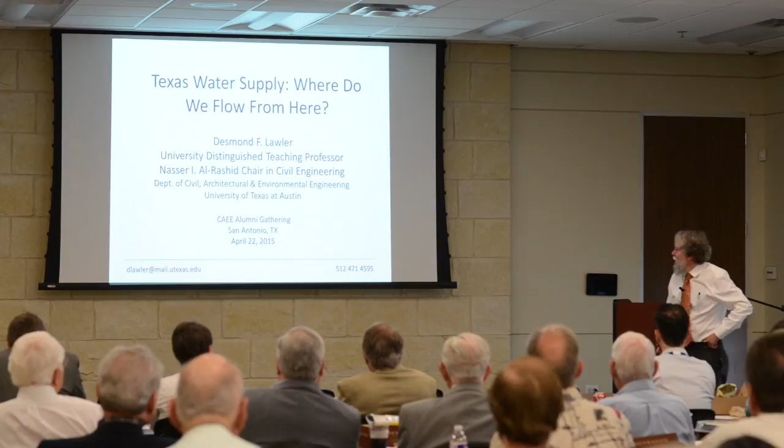Thank you all, and I hope to talk to you today a little bit about where do we go from here in terms of getting water for the state of Texas, and I have some ideas I'd like to share with you in this regard.

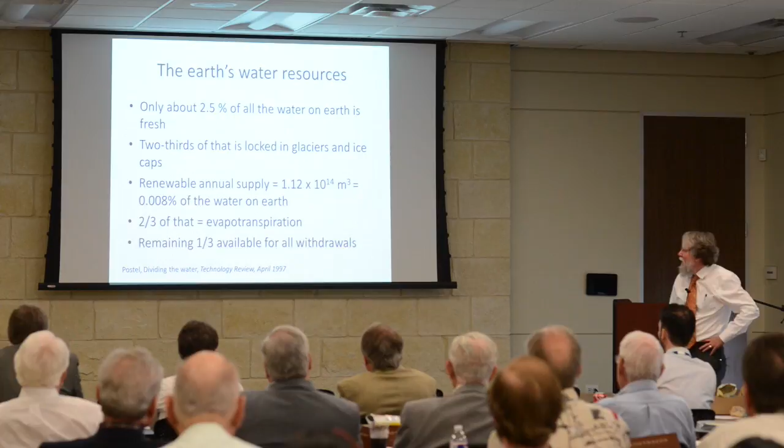Just to give you a little background, the point of this slide is there's not very much fresh water in this world. Only about 2.5% of all the water on Earth is fresh water, and 2/3 of that is locked in glaciers and ice caps. Of course, those are melting, so that number is going to change in coming years, unfortunately.

The renewable annual supply, in terms of what falls as rain and whatever, is what looks like a huge number, but it's only a tiny, tiny fraction of the water on the Earth. And 2/3 of that is kind of recycled through evapotranspiration, which means only 1/3 of that tiny fraction is really available for us for water withdrawals. So even in the best of times, water is scarce.

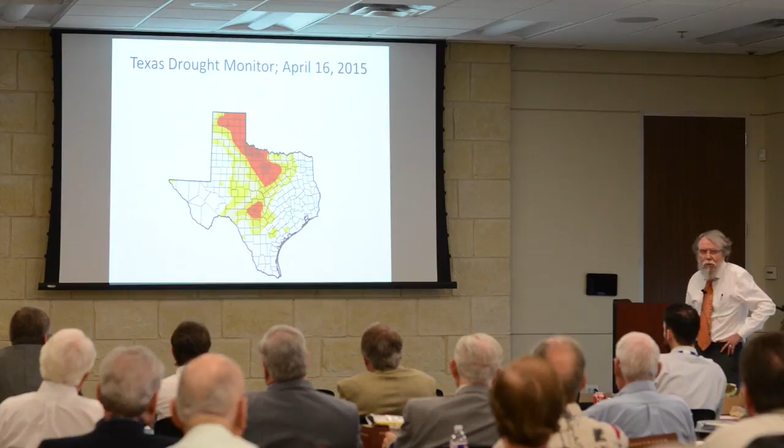So this is a problem, and it's not going away. We have to ask ourselves, where are we going to get water as the population continues to increase? This is kind of all the possibilities for where we might find water.

Conservation, both direct and indirect - I'll talk about that for a bit and tell you what I mean by that and what we can do. Municipal stormwater and rainwater harvesting, which I put together here because a lot of the ideas are similar, even though they're often dealt with somewhat separately.

New surface water reservoirs, new high-quality groundwater supplies - I'm not going to talk about either of those because I don't think they exist. I don't expect that we're going to be making any new reservoirs, or at least not very many. In the United States, we're taking dams away and destroying reservoirs rather than building new ones. I don't think it's going to happen in Texas, at least not in any substantial way. I don't think we have any groundwater supplies that aren't already tapped, and in Texas, over-tapped. So I don't expect that to happen.

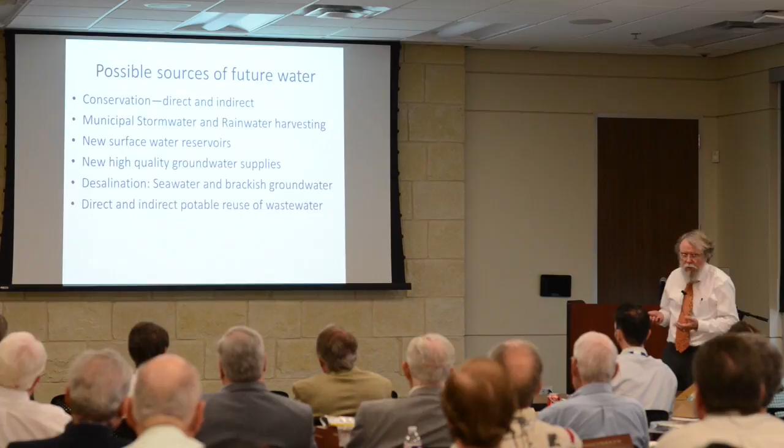Then we have the possibility of desalination, both seawater, which for us means the Gulf, and brackish groundwater, which there's a lot of in Texas. And then the possibility of direct and indirect potable reuse of wastewater.

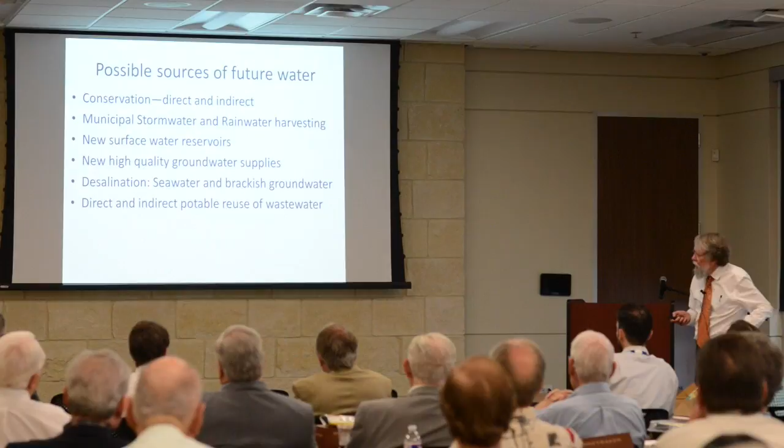So this is basically an outline of my talk. I'm going to spend several minutes talking about conservation, just 1 or 2 slides on municipal stormwater and rainwater harvesting. Nothing at all about these middle things because I don't think they really exist. I've done quite a bit of work on desalination - I'm going to bore you with some research slides on that, and then just 1 or 2 ideas on direct and indirect potable reuse. So that's where we're going today, and hopefully I won't take up all the time, and we'll have plenty of time for questions.

So, the first item we can think about is direct water conservation. I want to start with this because it's the one thing that every individual can actually participate in and make a difference on. By personal choice, you can save water by watering your lawn less frequently or not at all, or you can xeriscape your lawn so that you are not using water in the same way. Showers use less water than baths generally.

Not running the water while you're washing your dishes or brushing your teeth, these things actually make a difference. And of course, not washing cars. In Austin, you're not allowed to wash your car anymore. The only way you can wash your car is to have it done at a commercial establishment, and they probably don't want that to happen either, but you couldn't shut those businesses down.

There's also ways in which by engineering design we save water, and this is kind of interesting. Toilets in the 1950s and 60s used about 7 or 8 gallons per flush. Then around 1970, they went to 5 gallons per flush. Virtually all toilets put in houses and businesses these days are 1.6 gallons per flush, and there's new ones out that are 1.1 gallon per flush.

It turns out that the average person flushes the toilet 5 times per day. So a family of 4, if they have a 1.1 gallon per flush rather than a 5 gallon per flush, it's saving 3.9 gallons per flush in the course of a month. That means over 2,000 gallons of water, which is a substantial amount and actually makes a huge difference. And toilet flushing is the single highest use of water in a household. So if you haven't gotten around to changing your toilets to a low-flow model, I'd recommend you think about doing that.

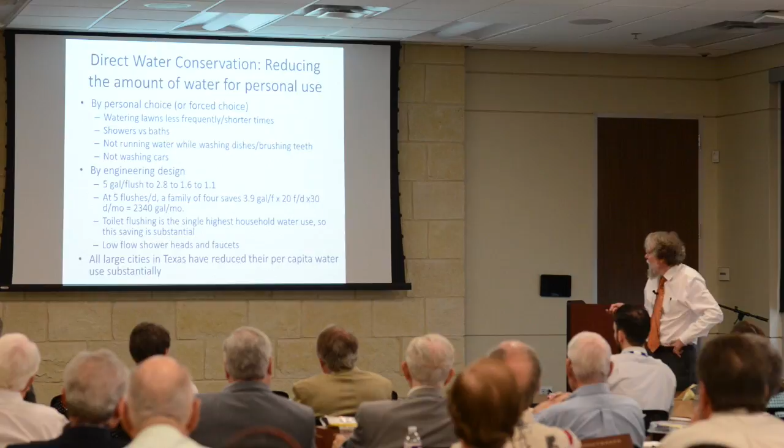And then, of course, there's also low-flow shower heads and faucets, which also in time make quite a bit of difference. It turns out that all large cities in Texas, despite the increase in population over the last 10 years, have reduced their per capita water use quite substantially. I'll show you a slide about that in a minute.

It turns out that there's also a lot of water that can be saved in industrial situations, and this is very site-specific. But I just wanted you to note that 10 years ago, the 5 largest water users in Austin were 4 semiconductor manufacturing plants and the University of Texas. And all of them have gone through a substantial process to reduce water usage.

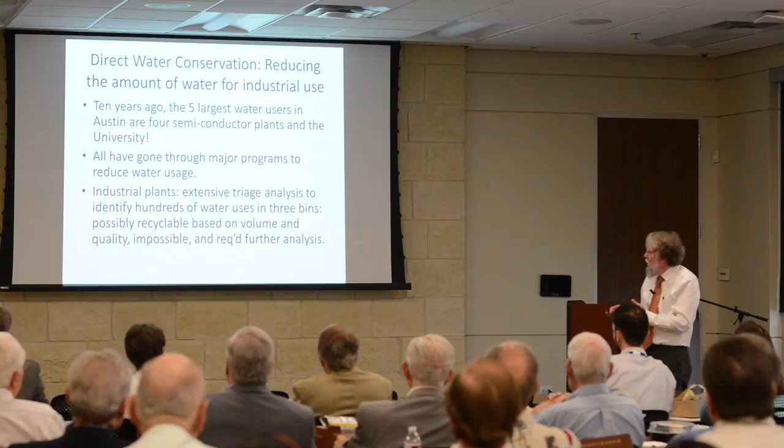I was involved with one of those semiconductor plants doing an extensive triage analysis. They had hundreds of uses of water in their plant, and with a graduate student, we looked at every single one of them for the possibility of reuse based on the quality of the wastewater as well as the volume. Then we started working with them on using the ones with the highest possibility for recycle, and saved a substantial amount of water in that plant.

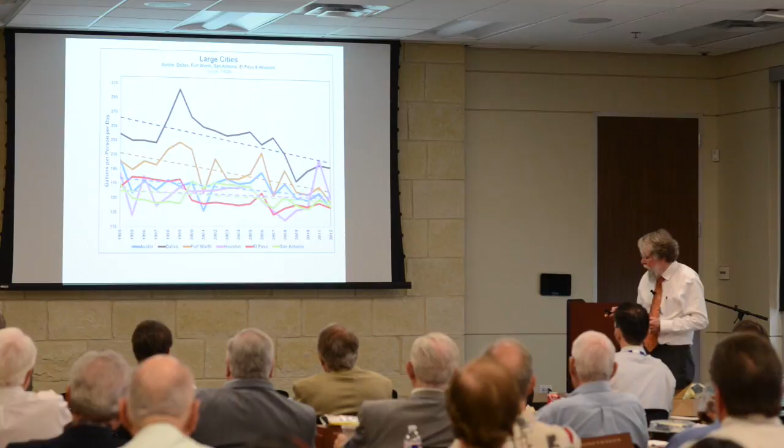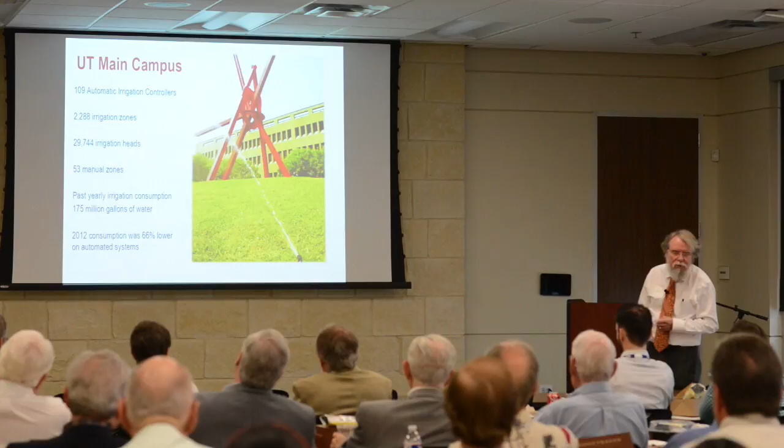This university has done a major job trying to reduce its water use. There's lots of details about this I won't bother telling you, but they have a huge amount of irrigation that goes on to keep the campus beautiful. They went through this process in 2011 to make many of these changes, and in 2012, their consumption of water was 66% lower than the previous year, which is an amazing amount of saving. Mostly it was because of these irrigation changes, although they also made changes throughout the university with low-flush toilets and shower faucet heads in bathrooms that were changed. So a lot of work has been done in that.

It turns out that in Austin, there's so much less use of water that the utility doesn't have enough money. So they've actually had to go to the city council and ask for a change in water rates because people are saving much more water than they had originally anticipated when they set the rates. So that's not necessarily a good thing. I mean, this water savings is a good thing, but the utility not having enough money to run the plants is not a good thing. But it is interesting to see how that can happen.

The second thing I wanted to talk a little bit about is indirect water savings and water conservation. And it all has to do with the fact that energy use and water use are closely related. Because we use a lot of water to produce energy, mostly for cooling towers, and we also use energy for water treatment and distribution and also in heating. So it turns out that these things are much more closely related than you might expect.

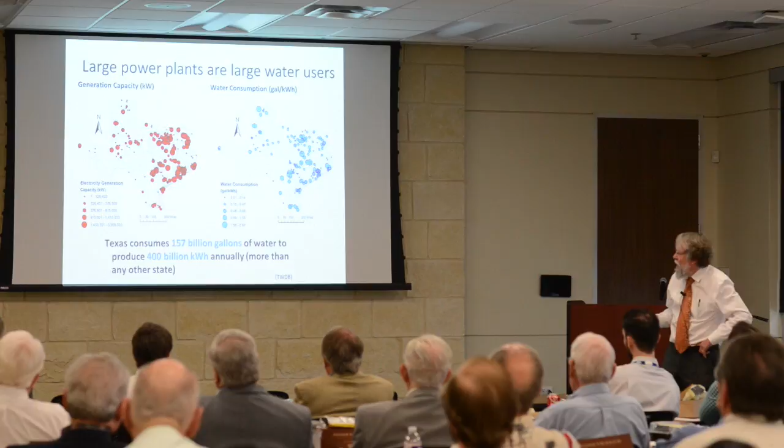So this is just two graphs of Texas. On the left we have the generation capacity in kilowatts, and on the right we have the water consumption in gallons per kilowatt hour. And you can see, just visually, there's a one-to-one correspondence between those things. So it turns out that production of energy takes a lot of water.

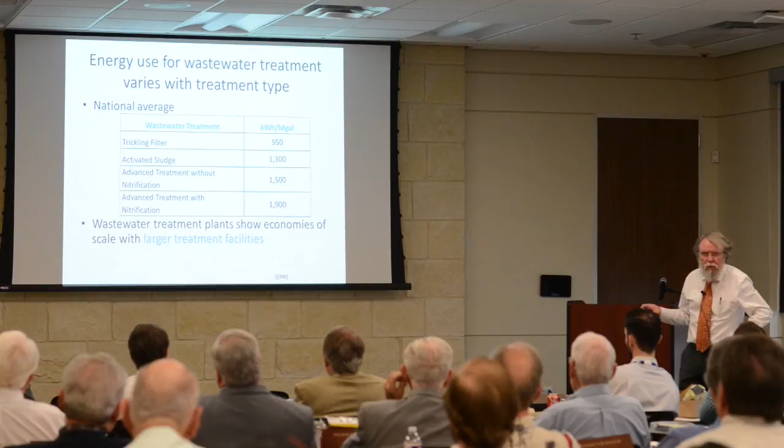And wastewater treatment actually takes quite a bit of energy. The typical plant uses activated sludge, about 1,300 kilowatt hours per million gallons of wastewater. If you do nitrification, it's even more, and if you do advanced treatment, it's even more. And of course, these days we're trying to get to these higher levels of treatment, so we're using a tremendous amount of energy per million gallons of wastewater.

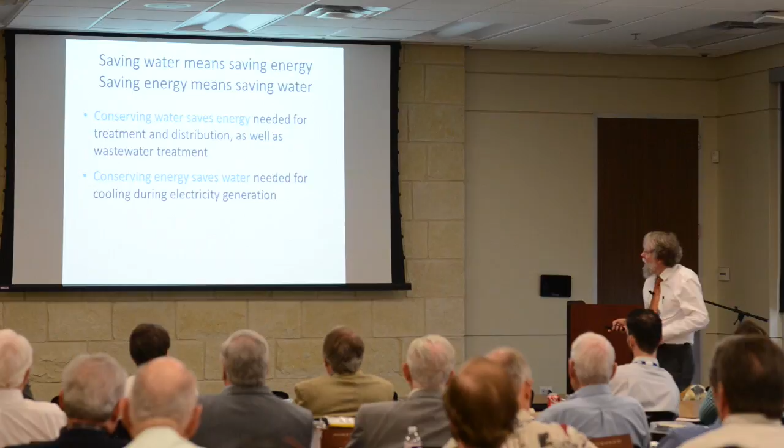So the idea is that if you use less water, you'll have less wastewater and therefore less energy use there, and then you'll have additional water savings from that. So the point is that saving water saves energy, and saving energy saves water. Conserving water saves energy needed for treatment and distribution as well as for wastewater treatment directly. And conserving energy saves the water that's needed for cooling during electrical generation. So if you turn out your lights or replace your light bulbs with LEDs instead of incandescent bulbs, you're saving water as well as the cost of electricity.

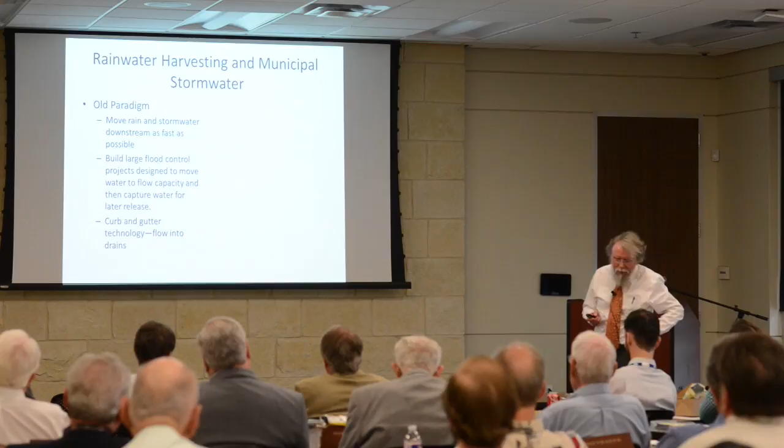Okay, so that's it on conservation, and let me talk just a tiny bit about rainwater harvesting and municipal stormwater. So I think the old paradigm for municipal stormwater was to get it downstream out of the city as fast as possible, and that required building some pretty large flood control projects, or making sure you had substantial drainage projects to have that happen. And you basically put in curbs and gutters to make sure the water flowed into those drains.

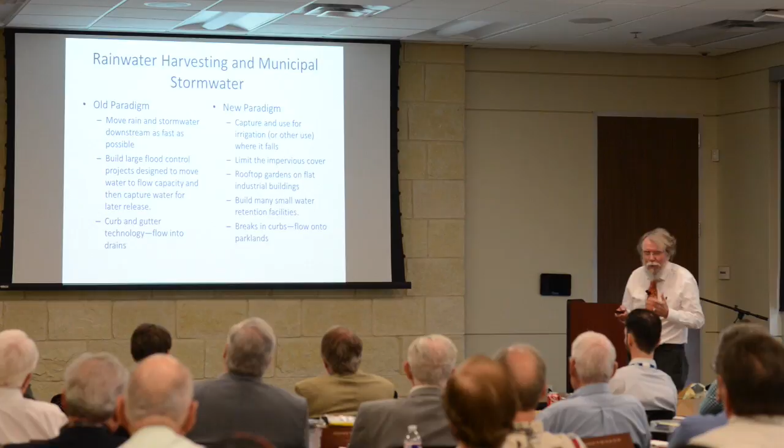But the new paradigm that hasn't really taken hold in our society, but I think should and probably will, is that you capture and use the water for irrigation or other use where it falls. This is a tremendous paradigm shift, and would affect every neighborhood in a city like San Antonio or Austin. You'd have to limit the impervious cover. You could think about making rooftop gardens on flat industrial buildings, of which there are many. And you might build many small water retention facilities so that the water would stay in the neighborhood and gradually get used there for irrigation or whatever.

And instead of trying to do curb and gutter and get rid of the water, you'd actually put breaks in the curbs to let water flow into the parklands or lawns or whatever. And this can make a big difference. And I just thought I'd show you a picture.

I have an editorial remark here about rainwater harvesting. I don't know if any of you are thinking about doing that in your homes, but I really discourage you from using harvested rainwater as your drinking water source. It might be necessary in some places in the hill country and things like that, and that's all well and good.

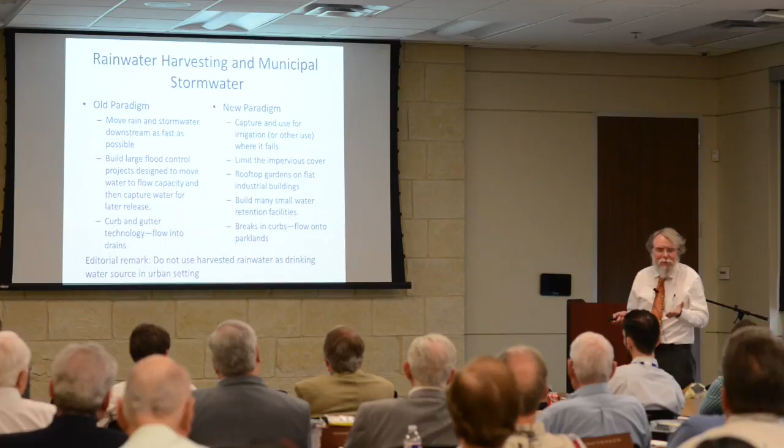You have excellent drinking water in the cities of Texas, and I believe it's much safer to use that as your drinking water source. Harvested rainwater can have a lot of contaminants in it that can make you sick tomorrow or 10 years from now, and I really don't expect people to do the kind of treatment that's necessary to make that water safe.

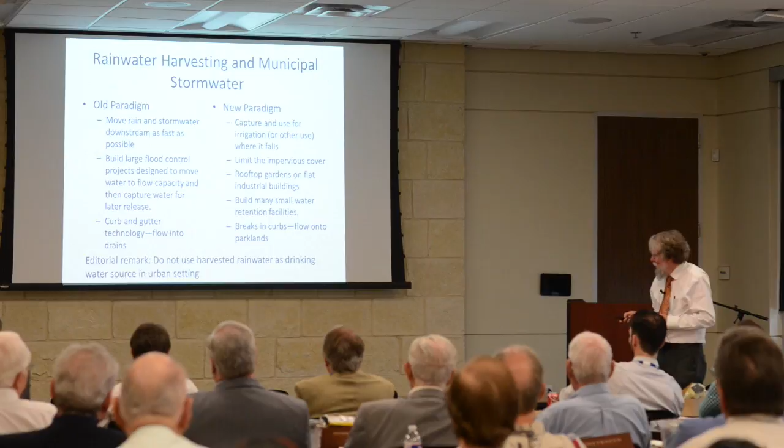His vision is to have this kind of thing done all over the city of Seoul, and for that matter, all over the world. In Seoul, it's really critical because they get a fair amount of rain and have tremendous flood problems. If they could actually capture the water on the rooftops, it would help. I don't know if any of you have visited Seoul, but it's a concrete jungle—20 million people live there, and rainwater and flooding are big issues. This would be a way to think about solving it. So I'm proud of my PhD graduate for coming up with this idea a number of years ago.

Okay, so I want to talk some about desalination, which I've done a fair amount of work on. I just want to highlight a couple of the things we've done in our research, and then try to make it make sense in terms of water conservation.

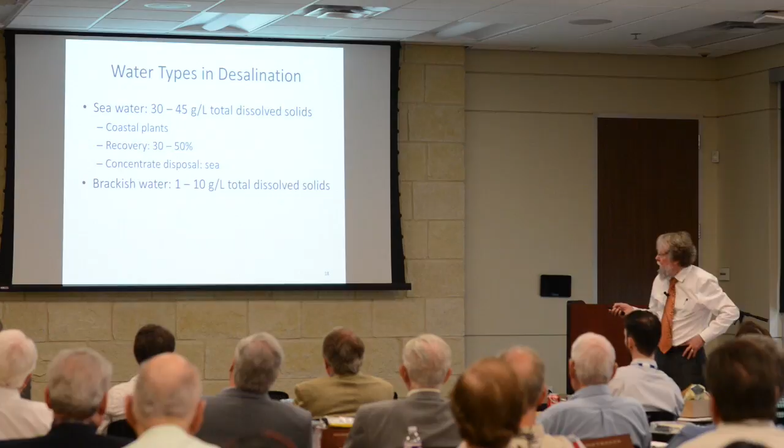There's a difference in how you do desalination, or what you can expect, between these. In seawater, of course, you're talking about coastal plants. The recovery—the fraction of water you bring into the plant that you actually get to use as drinking water—is in the range of 30 to 50%. Typically, the concentrate disposal is to just dump it back in the sea.

This is actually somewhat controversial in California right now, where one of the major cities is thinking about doing desalination in a major way, and people are wondering whether it's really okay to put that concentrate back in the sea. By the concentrate, I mean it's going to have all the salt in it. So if you get, say, 60% recovery, you're going to have 2.5 times the salt concentration in the concentrate than you started with, or at least approximately.

What happens if you put that back in the sea? Well, if you put it far enough out in the ocean, it's almost as close to an infinite sink as you can imagine. But if you put it near the coastline, it could have some real problems. And of course, if you put it far out, it's going to cost you a lot of money to do that. So it's somewhat controversial, but generally speaking, people think putting it back in the sea is okay.

But in brackish water, you're dealing with an inland situation where you don't have the sea as a reasonable place to put the water. Because you have less dissolved solids, you end up being able to recover a much higher percent, 65 to 90%—again, that's the water you actually get to use versus what you put in. Somewhere in the range of 75 to 80%, in the middle of that range, is most common, and this is happening in Texas, in several places.

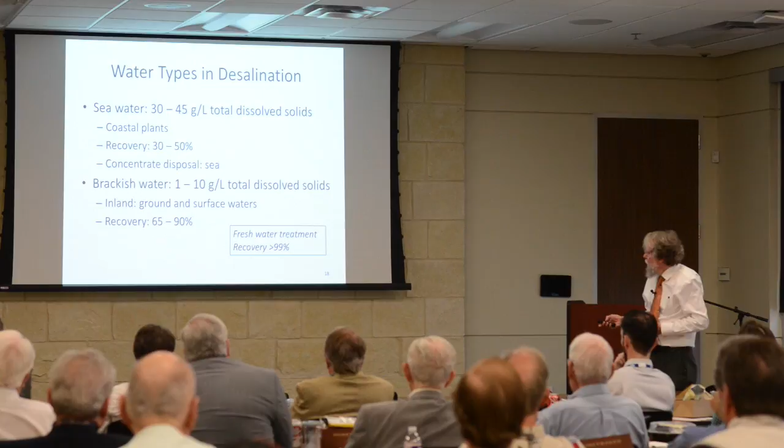So the real question for brackish water is, what do you do with that concentrate? Where do you put it? What do you do with it? That's a question that we addressed in our research.

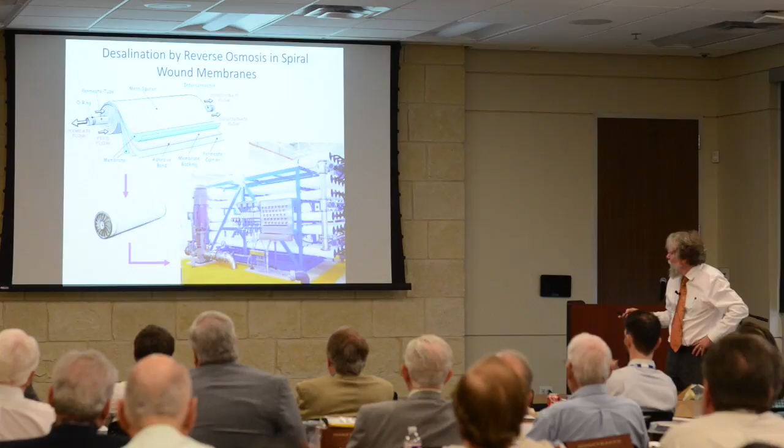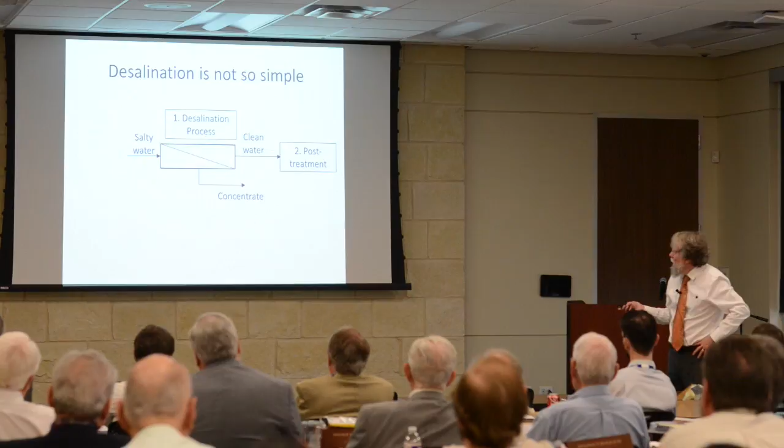Desalination is really not so simple. There are issues associated with the desalination process itself, with the post-treatment of the water, with pre-treatment, and with concentrate. My own research has had to do with pre-treatment and concentrate management, and I'll say more about that.

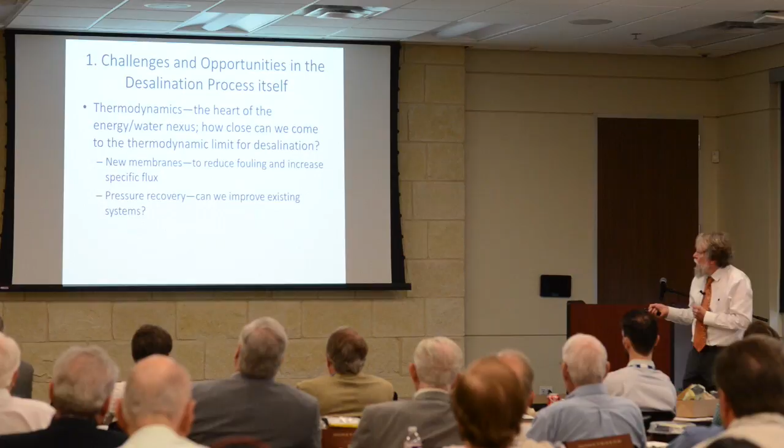Within the desalination process itself, there's a thermodynamic limit to how much energy is the absolute minimum you can spend to get salt out of water. The question is how close we can come to that with good engineering to save energy. There's been a lot of progress with new membranes that reduce fouling and increase flux, how much water you get through per unit area and per unit of pressure, and also whether you can recover the pressure used in the process.

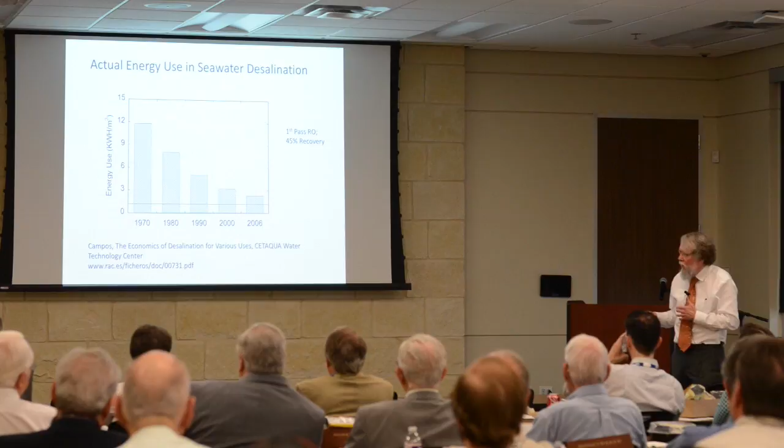In 1970, people said it's impossible, way too costly to do in every way. Now, with the latest data I had from 2006, and there have been improvements since, it's somewhat reasonable. It's still a big use of energy and still more expensive than other things, but it's not out of sight to do desalination. And this is for seawater, which is more expensive than brackish water.

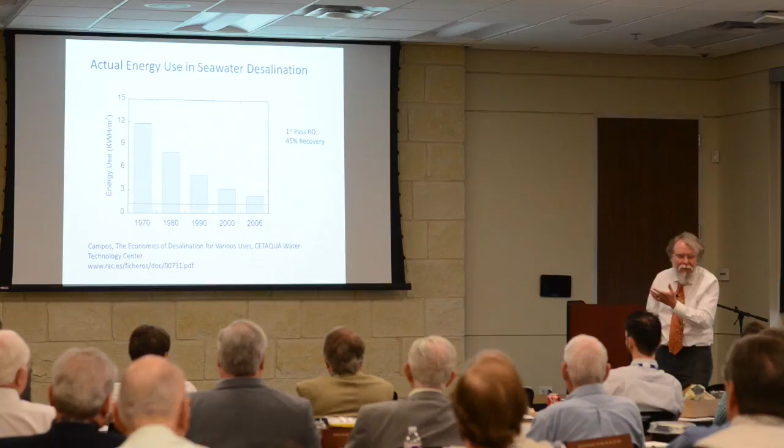Post-desalination is interesting. It turns out the water that comes out of reverse osmosis membranes is so clean that it's a problem. It's too corrosive to just put in pipes, and it tastes terrible. I don't know if you've ever tasted distilled water, but it's like you want to spit it out because it has no taste.

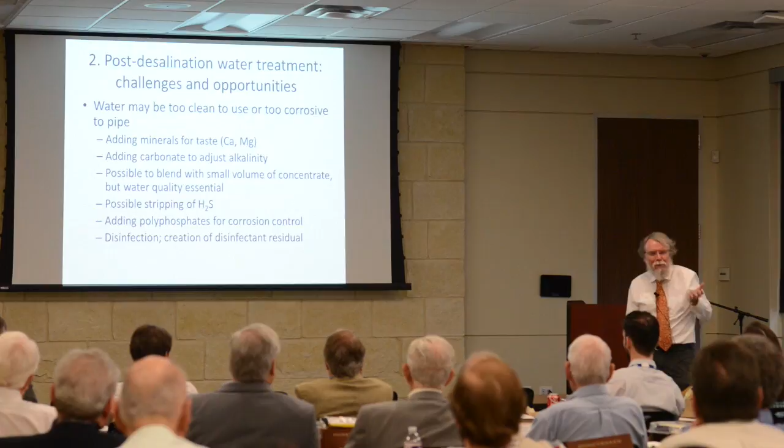Where does the taste of water come from? It comes from minerals. Coke and Pepsi, who make bottled water, like Dasani and the Pepsi brand, and I guess we have Ozarka here too which is theoretically natural, do reverse osmosis treatment, ozone treatment, and other things to make the water as pure H2O as they can. Then they have their own recipe for what minerals to add back so you actually like the taste when you drink it.

If you do this for a whole city, you also have to add minerals back to make it taste right, and add carbonates to adjust alkalinity so you don't corrode the pipes. It's conceivable in some cases you could blend with a small volume of the concentrate, but that would be rare because the water quality probably wouldn't work well. You also have to add polyphosphates for corrosion control, and you have to do disinfection. So there's a lot of work to do after desalination to make this work.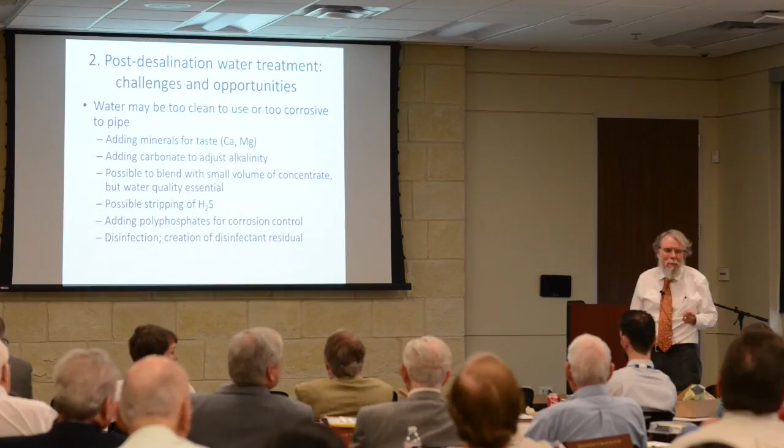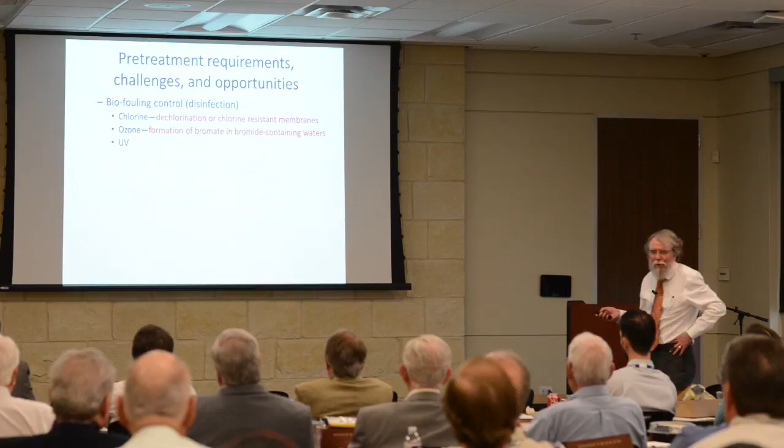Pretreatment has several opportunities or challenges. One is we have to control biofouling of the membranes. That would be not a good thing. So we have to do chlorination or ozone treatment beforehand. If you do chlorination, then you have to dechlorinate because the membranes can't handle the chlorine.

There's particle removal processes which are typically important. And then the biggest problem in reverse osmosis membranes is precipitation onto the membranes, which is called scaling. So you have to do some kind of scaling control to make this work.

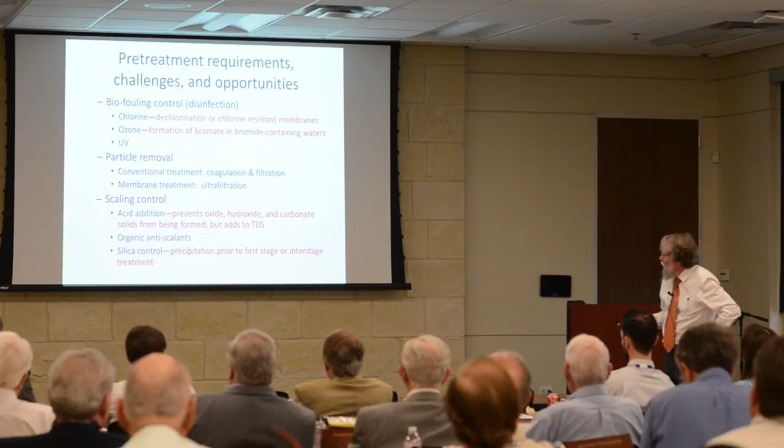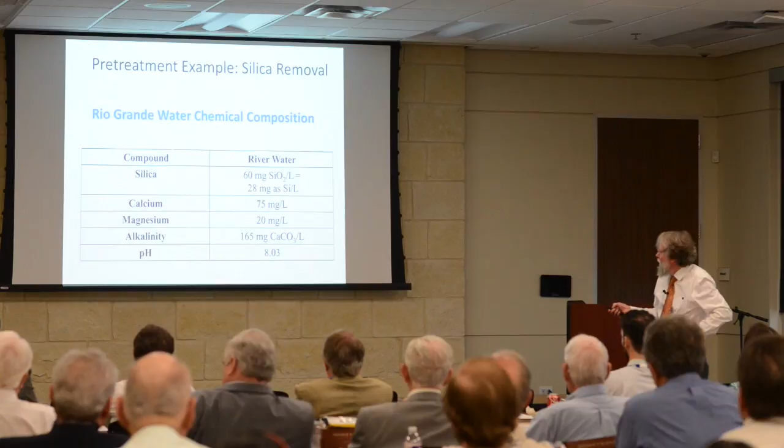I'm going to talk a bit about our research on silica control. It turns out the Rio Grande River has a substantial silica concentration, and if you're going to desalinate that water, silica is going to limit what kind of recovery you can get. It also has a fair amount of calcium, magnesium, and alkalinity, which are important to us as well.

Without boring you with all the details, we did a variety of tests to figure out what pretreatment would be necessary. We came up with various treatments adding lime, some magnesium, and some sodium carbonate. This raises the pH and precipitates several things. As a result, we went from raw water with high silica, magnesium, calcium, and alkalinity to much, much lower levels in all of these cases.

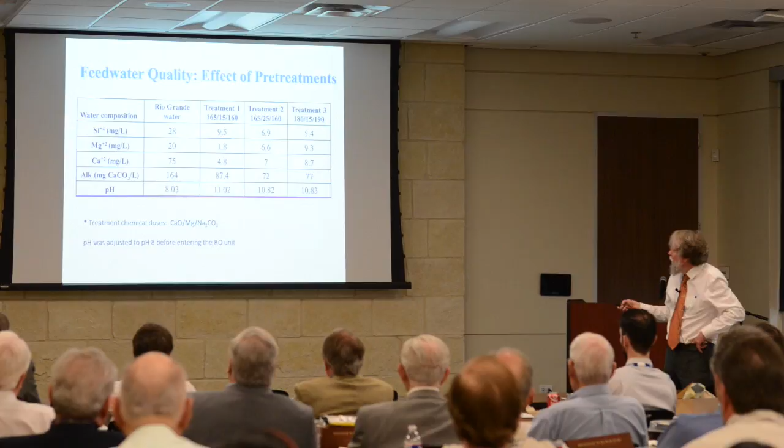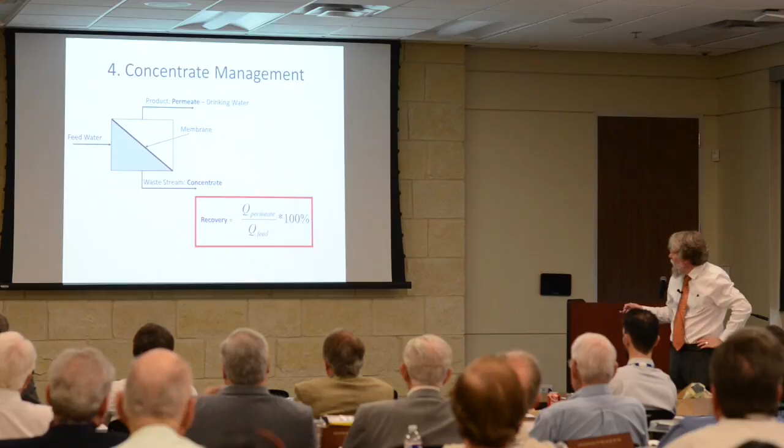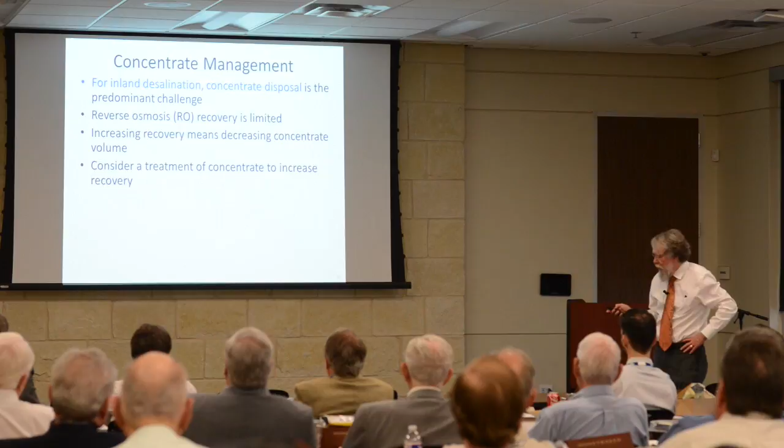Concentrate management is another area I've spent quite a bit of time on. The idea is: what can you do with this concentrate? This is the predominant problem in inland desalination, what do you do with the concentrate? Our idea was to consider treating the concentrate itself to allow you to increase the recovery further. We did this in a couple of different ways.

Here's how this works. You usually have a few, 2 or 3 RO units in series, taking the concentrate of one as the input to the other, and taking what passes through the membrane as your product water. You usually put 2 or 3 of these in series, and then have to throw out the concentrate. But we decided to use either electrodialysis or another system as a way of recovering even more and adding to the product water.

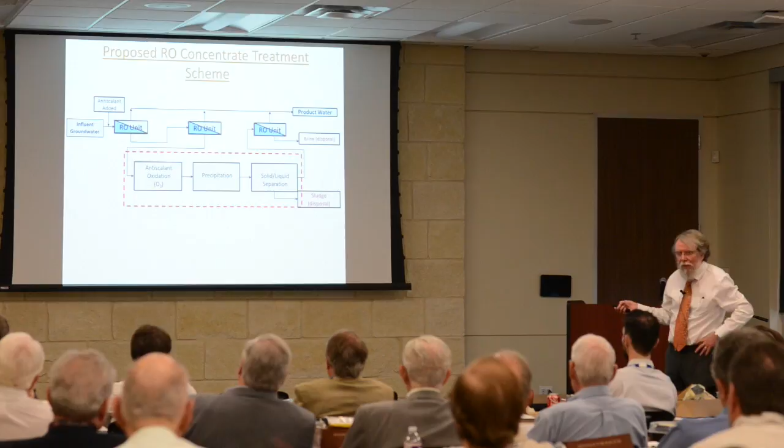The other way we did this, besides electrodialysis, was a scheme where we oxidize, then do anti-scaling, then precipitate in a separate unit. So rather than have scaling happen on the membrane, you precipitate separately, then do a solid separation to get rid of that precipitate, and take that water and put it back into the next RO unit.

We did lots of things where we tried to do the anti-scalant oxidation, and that's measured here because the anti-scalant had phosphorus in it, so we measured how much phosphorus was released. We did lots of different experiments, and I'll show you what they were about in a minute. Some worked very, very well, and others didn't work nearly as well.

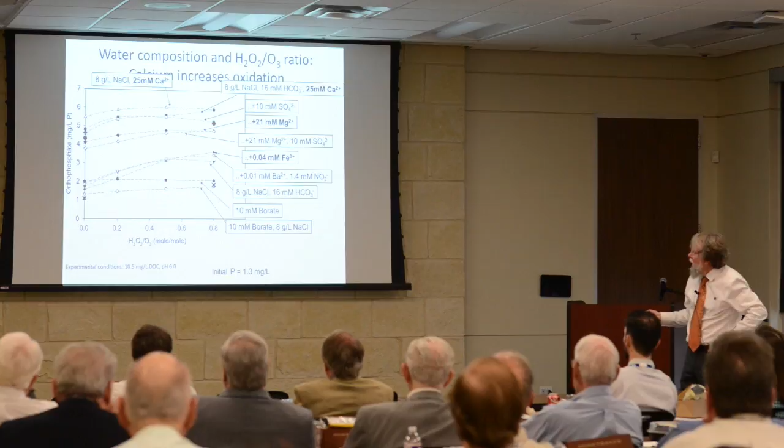We're using a combination of hydrogen peroxide and ozone to do that oxidation. We did all these different conditions, and they all had different results. The key is that all the top ones, which are good, contain calcium. When you had both iron and calcium in there, it didn't do so well. And all the ones at the bottom didn't have calcium. So calcium was clearly a key player in this.

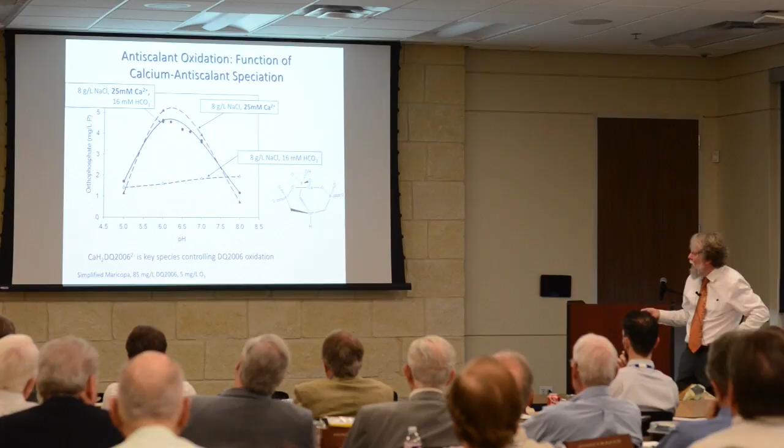We did lots and lots of experiments to try to figure out why. It turns out the bottom line of this result is that the calcium could complex with the antiscalants in the water and change the conformation of it to allow ozone to attack this molecule. Very complicated to figure this out.

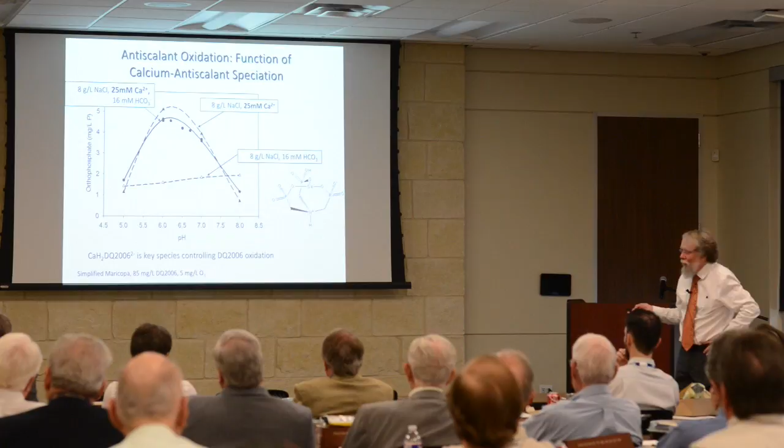PhD student Lauren Greenlee did this work for her PhD. The result is that you could improve the recovery of desalination substantially, from in the range of 80% to perhaps 95 to 96%, by doing that change. That's a huge difference in terms of how much water you have to dispose of.

If you have 80% recovery, you have 20% of water that you have to dispose of. If you have 95% recovery, you have only 5% of the water that you have to dispose of. So you've reduced that disposal problem by 75%. So it's not so much the value of the water, it's the saving of the disposal problem that makes this worthwhile.

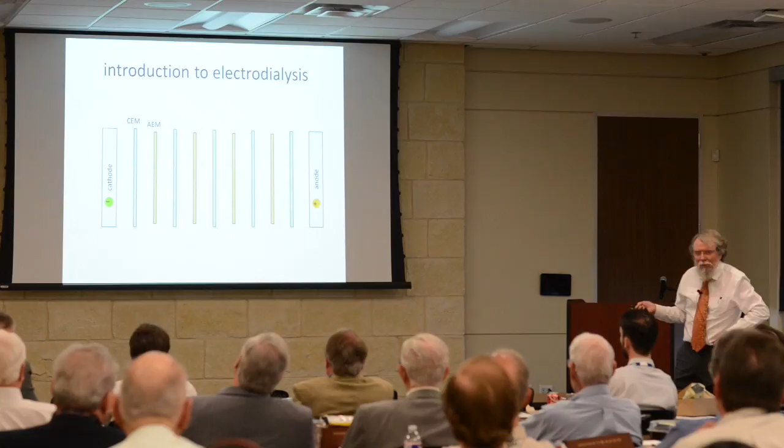The second way we did it was with electrodialysis. It's obviously an electrical system. You have a cathode and an anode, and membranes in the middle - a cation exchange membrane and an anion exchange membrane. You put water up through them all.

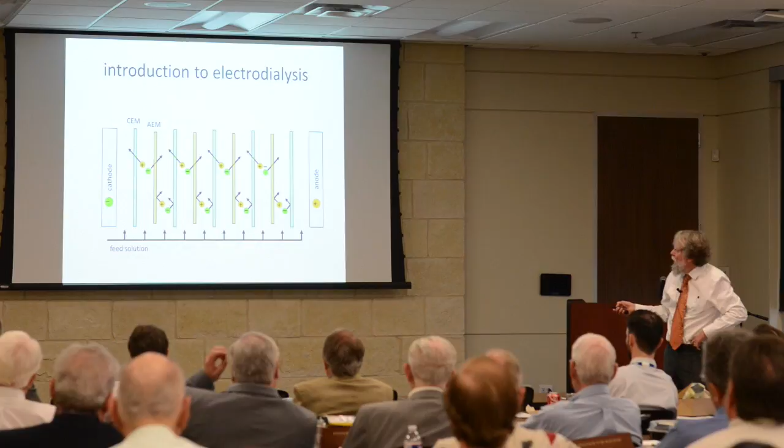It turns out that in some cases, with an anion exchange membrane, cations can't pass through, so they try to go toward the cathode and can't get there, and the anions try to go to the anode and can't pass through the cation exchange membrane, so they're trapped. But in the adjacent units, the cations can pass through the cation exchange membrane and the anions can pass through the anion exchange membrane, and you end up with clean water coming out the top.

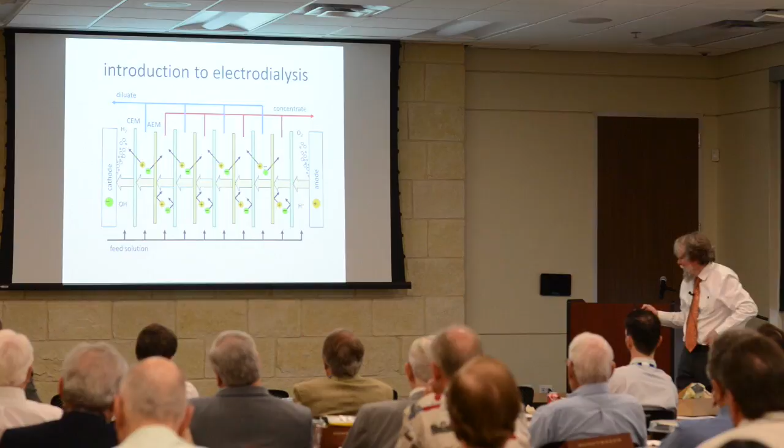You collect separately the clean water as the diluate and the dirty water as the concentrate, and you can use that diluate as product. There's also production of gases, hydrogen on the cathode side and oxygen on the anode side, so there are issues with cleaning off that water.

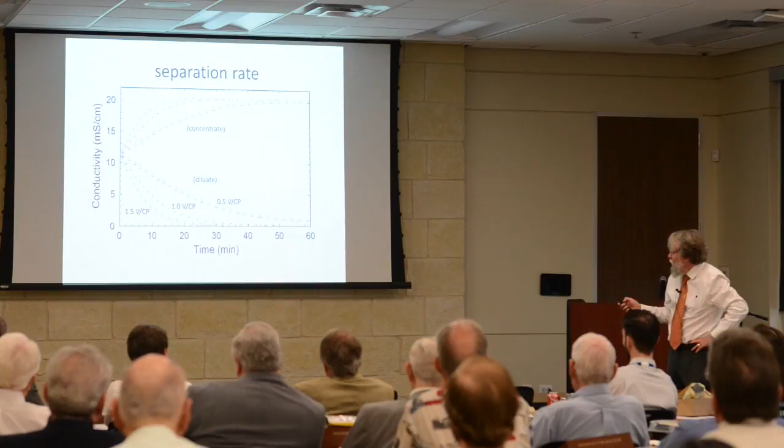So the diluate, which is the water that we want, we can make the conductivity dramatically reduce over time, which would be the equivalent of passing through the electrodialysis system. We're moving all the ions from the diluate into the concentrate, so the concentrate conductivity goes up. And it's a function of how much electricity you supply to make that work.

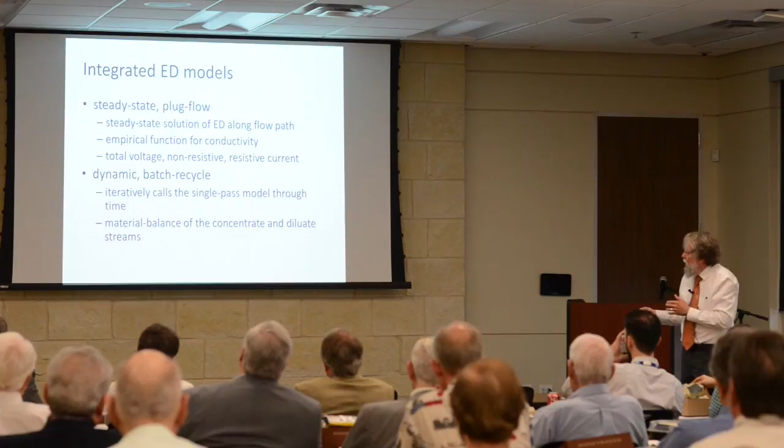We also then could model mathematically what was going on in here. The details of this are way beyond what we need to talk about today. But in any case, the point is that we built a mathematical model to describe what's going on in here. And presto, we could model perfectly what's going on.

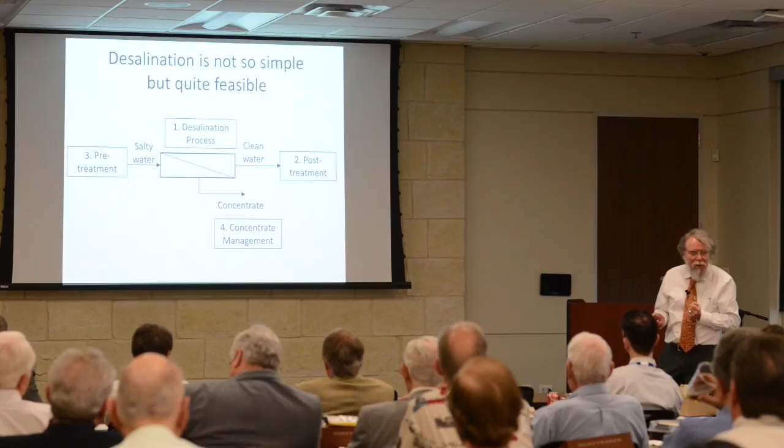So my point of this is that desalination is a very possible way to increase the water supply that we have. It's not so simple, but it is quite feasible. And I tried to indicate what some of the issues and opportunities were in each of these four areas.

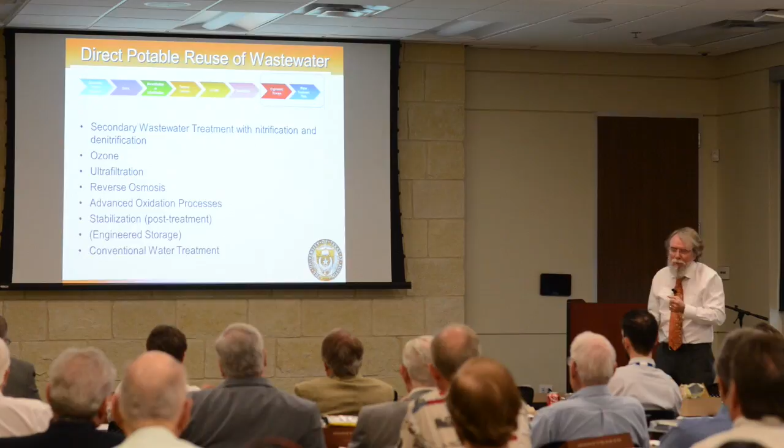The last thing I want to talk about is direct potable reuse of wastewater, the so-called toilet to tap. You take your wastewater, treat it really, really well, and make it into drinking water. There are only 2 plants in the country doing this right now, both in Texas, and they're working fine. It makes a lot of sense, but it takes a lot of treatment.

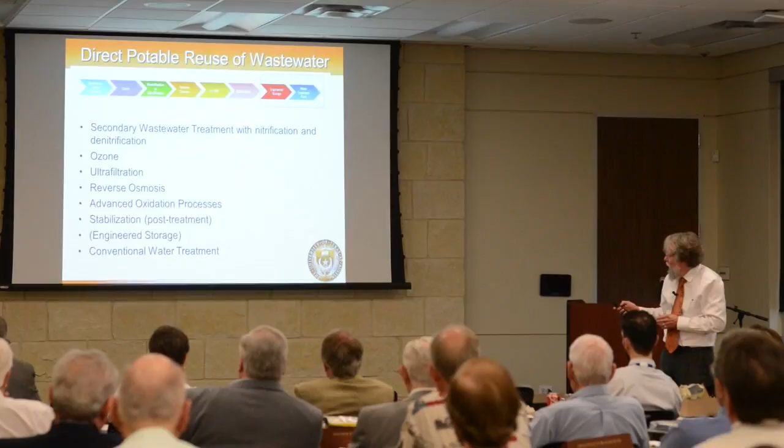This is the treatment process we have. You take secondary wastewater treatment, do nitrification, which converts ammonia to nitrate, and then denitrification, converting that nitrate to nitrogen gas, which goes out into the atmosphere.

This schematic is taken from a report to the Texas Water Development Board done by Alan Plummer and Associates. Anybody know Alan Plummer? He's a PhD graduate of our program many years ago, has a wastewater firm centered mostly in Fort Worth and Dallas.

What this schematic shows is: you do the secondary wastewater treatment, then an ozone treatment, then ultrafiltration to remove particles, then reverse osmosis to get rid of salts and many organic compounds. In case anything got through that, you do an advanced oxidation process to destroy any organic molecules left in the water. Then you do post-treatment, just like the post-treatment we talked about in desalination, possibly some storage, and then put it through a conventional water treatment process.

This is the way it's done in the two plants that exist. There are various minor adjustments that can be made, but virtually everybody is using reverse osmosis, and everybody is using some kind of oxidation process either before or after, or both.

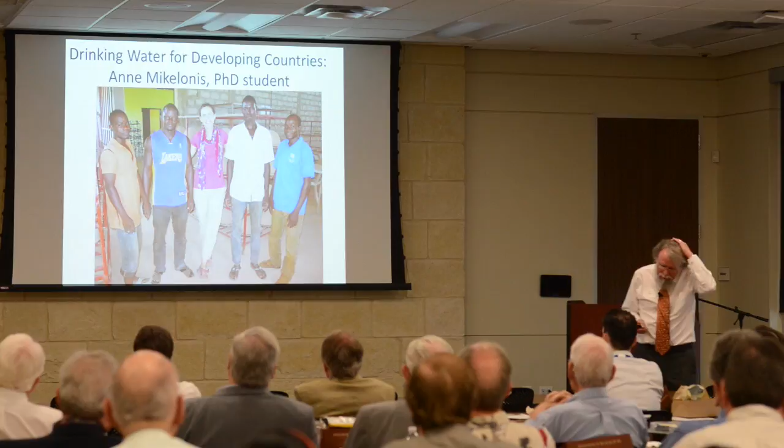Finally, I wanted to comment that we have worries in Texas, but I wanted to show you a couple slides about my PhD student, Anne Mikelonis, who's in the center here. This is a picture taken in Ghana just a couple of months ago. She's working on how to make drinking water in developing countries.

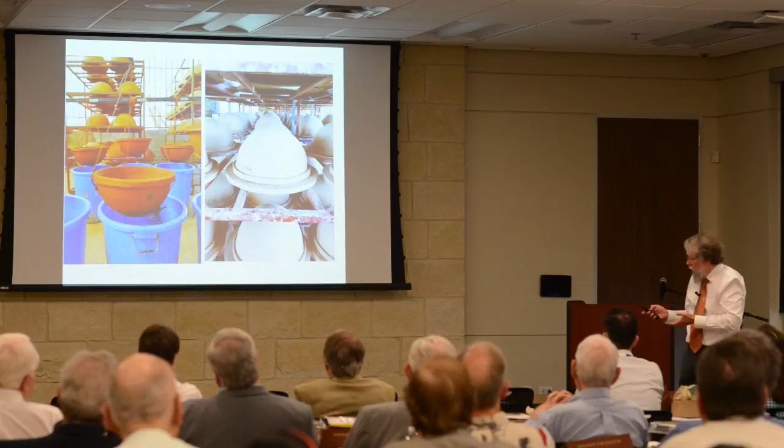And this is taken at a plant that makes these small pot filters, and they get coated with nanoparticle silver. Silver is a great disinfectant. As you pass water through these and collect it into a bucket, the silver disinfects the bacteria and viruses that are in that water, and you end up with much, much safer drinking water for having done that.

This is actually from the research she did over there. They allowed her to use 15 of their pots that were done. She actually coated some of them herself with silver that she had brought with her from Austin, and in some cases used the ones that they had as well. She tested what the water quality was for all of those things, and it turned out to make a big difference.

So water quality is totally essential. The women in this society sometimes walk for many, many miles per day to get really dirty water to supply water for their family. They put it through these filters, and it's not nearly the water quality that we have, but it's way better than what they had before.

And in the end, this is what drinking water supply is all about.

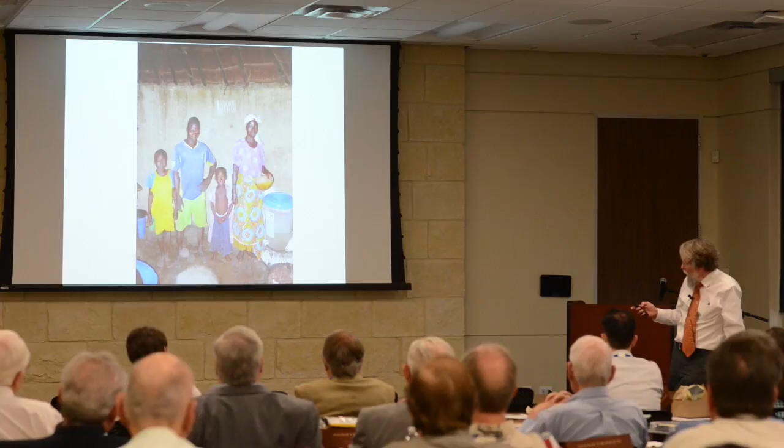Yes, sir. On the train of processes related to the reverse osmosis, what is happening to the bacteria and the viruses in that system?

Yeah, so the reason why we're using ozone up front is largely for disinfection purposes at that point. So we're doing disinfection here before we get to the RO. And then this advanced oxidation process would also kill any bacteria and viruses that are in that water at that point. And then, of course, in conventional treatment, we're going to add a disinfectant for the distribution system. So there's multiple ways in which microorganisms are accounted for in this system.

What is the output product related to the advanced oxidation? In other words, is it ozone?

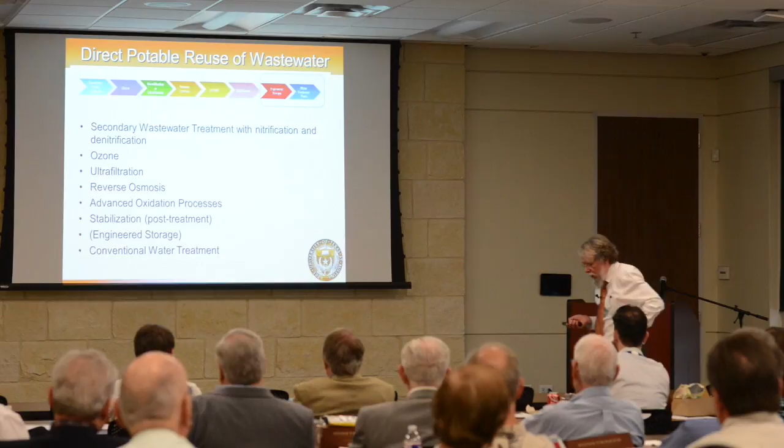Oh, so what advanced oxidation means is that we're somehow producing hydroxyl radicals. Ozone can do that, but typically ozone in combination with ultraviolet light, or ozone in combination with hydrogen peroxide, is used to create the so-called advanced oxidation process. It turns out that hydroxyl radicals are highly oxidative, so this is like the cat's meow of oxidation. When people ask about getting rid of pharmaceuticals in water, advanced oxidation is the way that they would talk about it. I don't think any bacteria can survive these processes.

Thank you. What options do we have for waste management for the concentrate from inland desalination? Oh yeah, that's a good question.

So one option that's used, that makes absolutely no sense to me whatsoever, is to put it into a sewer and send it to the wastewater treatment plant, which does absolutely nothing to those salts, and is, I think, a ridiculous option.

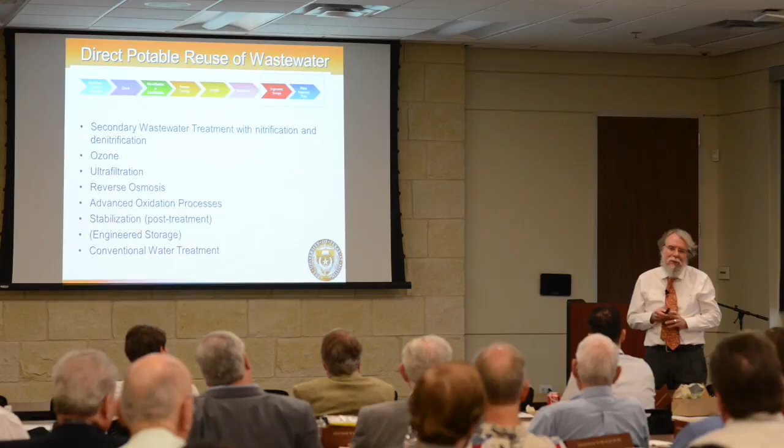But one of the reasons why I think reducing the amount of concentrate can make a big difference is that you can get the volume of the water low enough, especially in Texas, that you could think about evaporating the rest of the water. There are engineered evaporation systems that increase the rate of evaporation, and then you end up with salt. Unfortunately, one of the things people have dreamed about is ending up with a useful product from that, but the separation of all the different ions is difficult, so it's unlikely. Well, it hasn't been solved yet.

Yeah, what were the two locations in Texas you used? Wichita Falls and Big Spring. Yes, okay, Big Spring.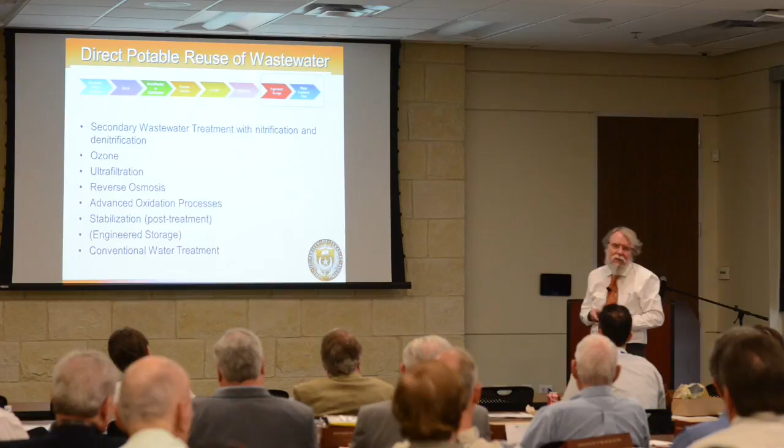And I haven't been to either of those plants yet, but I know a fair amount about it. They use more or less this treatment scheme. What happened in both of those cases is that they were absolutely running out of water. I think the statistic for Wichita Falls was that the reservoir was down to 2.5% of its capacity when this plant came on. I don't know what the statistic was at Big Spring, but it's similar. So it was dire circumstances that led to this. I think we should be proud of it. Texas is a leader in wastewater reuse.

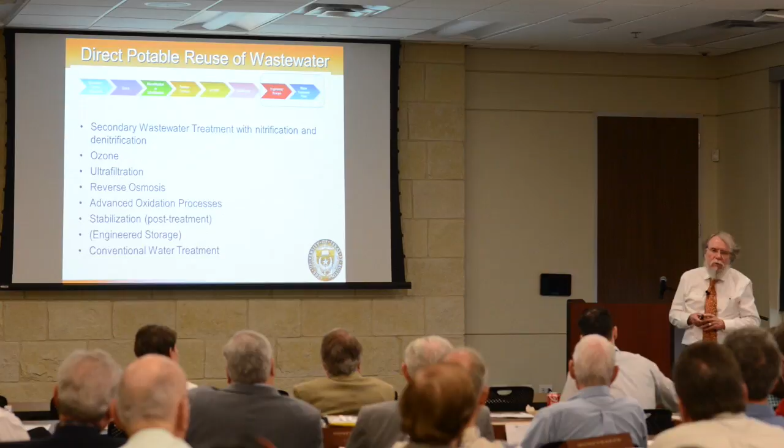Yes, you didn't mention anything about gray water. I didn't mention anything about gray water. It's a good point, and I already took more time than I was supposed to. There is a lot of interest and a lot of work going on, including in our department, about the use of gray water for irrigation and other things. There's definitely an option to do that, and it reduces how much drinking water you're using for the purposes that you're doing. So yeah, it should be on the list.

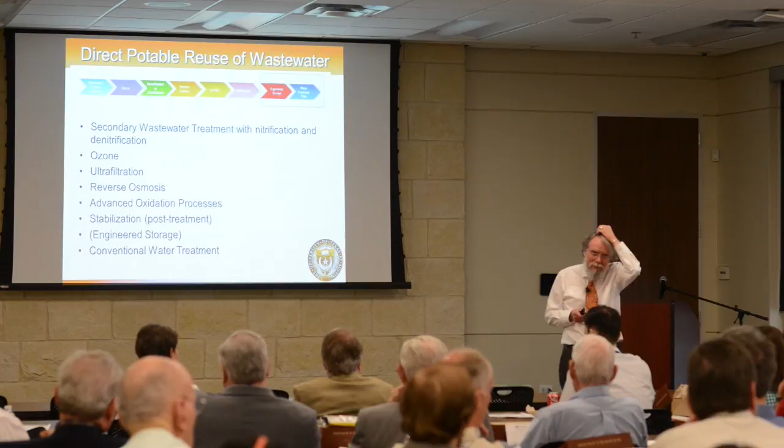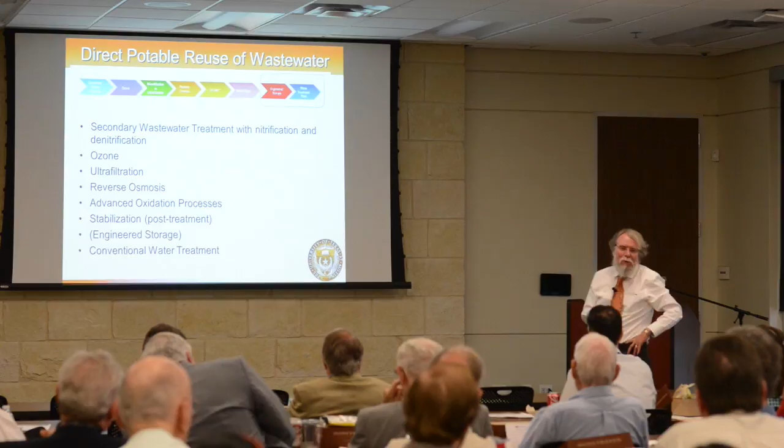I agree. Yes sir, you didn't mention anything about aquifer storage and recovery. That's true, I did not, and it was on my first slide about indirect potable reuse, so that concept is very closely related to what I'm talking about here about direct potable reuse. The difference is that instead of this engineered storage, you do a natural storage in a groundwater aquifer or perhaps in a surface water reservoir. This has been used in California quite a bit, and it's used in Texas, I think in this area some as well. And it's a very good option.

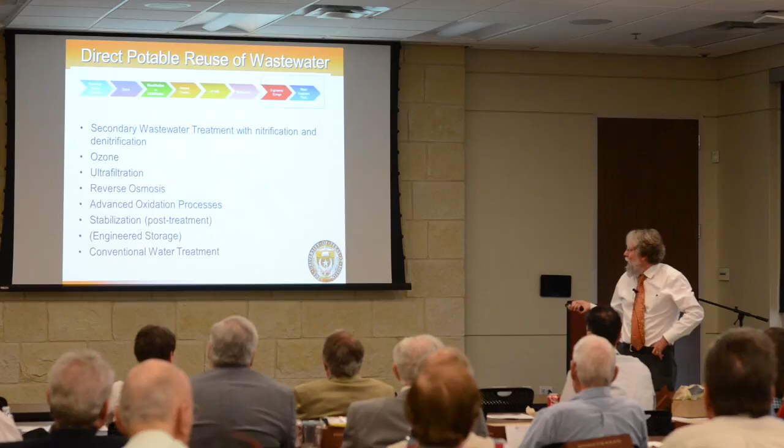Treatment-wise, it's really not significantly different than this, although people think you can get away with a little less treatment because you have this natural buffer storage. But I think of them as being very closely related. The biggest difference is public acceptability. People are, except in dire circumstances, not ready to accept the idea of toilet to tap. Whereas when you put natural storage or a so-called environmental buffer in there instead of engineered storage, people seem much more willing to accept that it's fine water. In both cases, I think it's fine water. Yeah, that's right, I stand corrected.

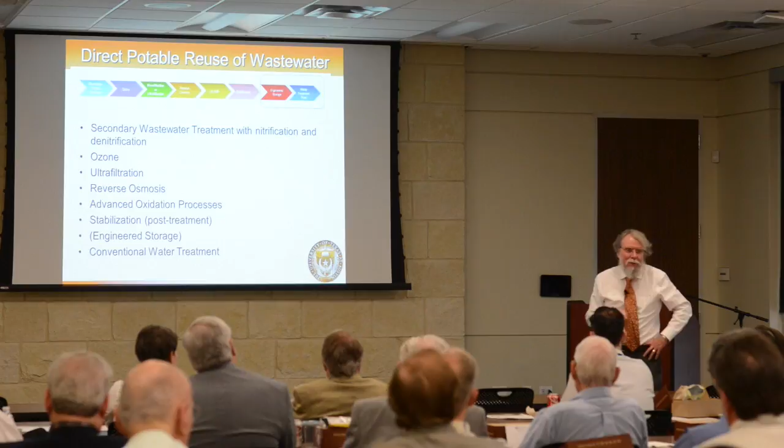Anybody else? Does El Paso also treat some of the wastewater? El Paso is in the midst of investigating this possibility, but they're not doing it yet.

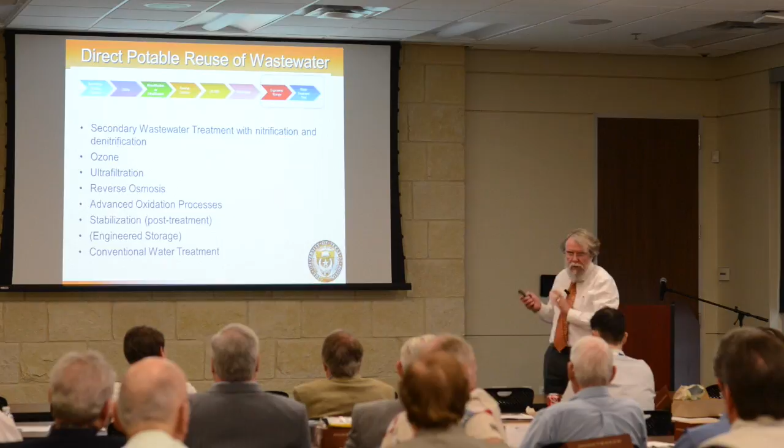El Paso is a leader in desalination. They're using brackish groundwater as their water supply. When it was built, 5 or 8 years ago, it was the largest desalination plant in the U.S. for brackish groundwater. And they are investigating now the possibility of using direct potable reuse of wastewater. In fact, the design is going on. I'm very familiar with that because they've asked the National Water Research Institute to provide some guidance between their design engineers and the utilities, to have somebody else look at that whole system and make sure it makes sense. I'm one of the people on that, so I know a lot of details. But it's not approved yet, it's not even decided yet, but they are definitely heading in that way.

Interesting thing, I've been to El Paso 4 days in the past year for this reason, and it's rained all 4 days.

You need to keep going. Anybody else?

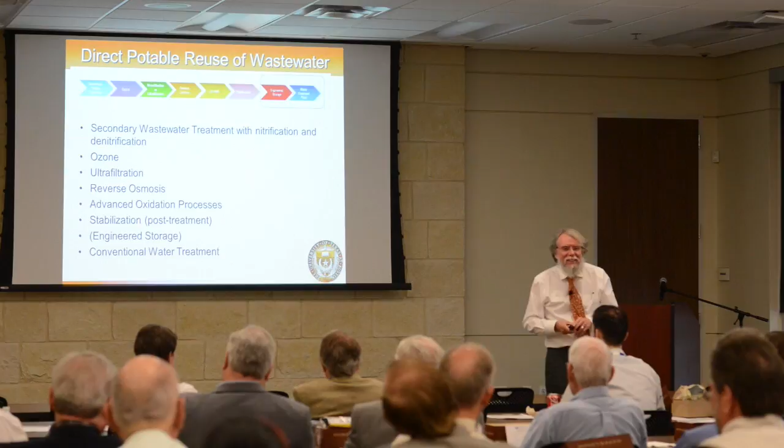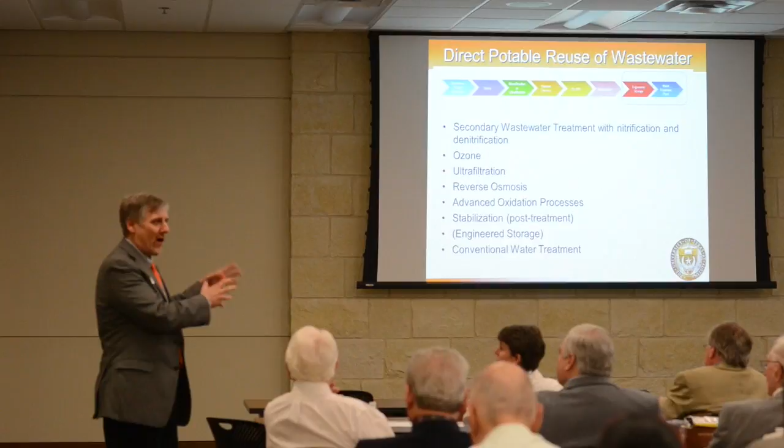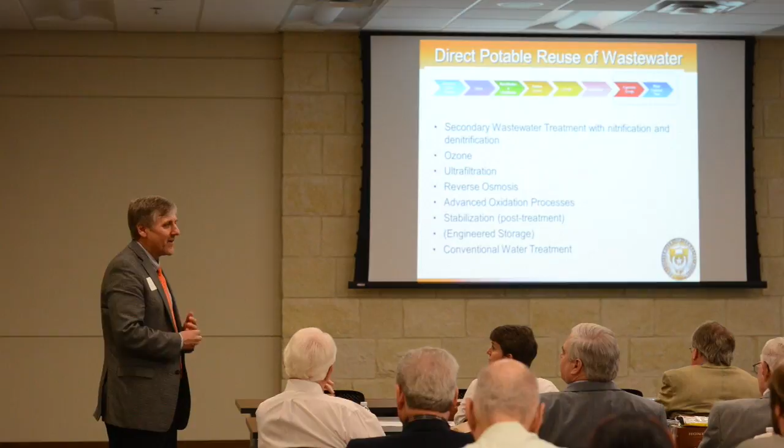Well, thank you so much, and thanks for being great graduates of our program. I'll just say a couple more things. Hopefully you're proud of the fact that you heard Des say probably 10 times in his presentation that we are working on these problems. So hopefully that makes you proud that there are faculty and undergraduate students and graduate students that are working towards helping to keep water flowing in Texas. So thanks to the environmental engineering group for that.